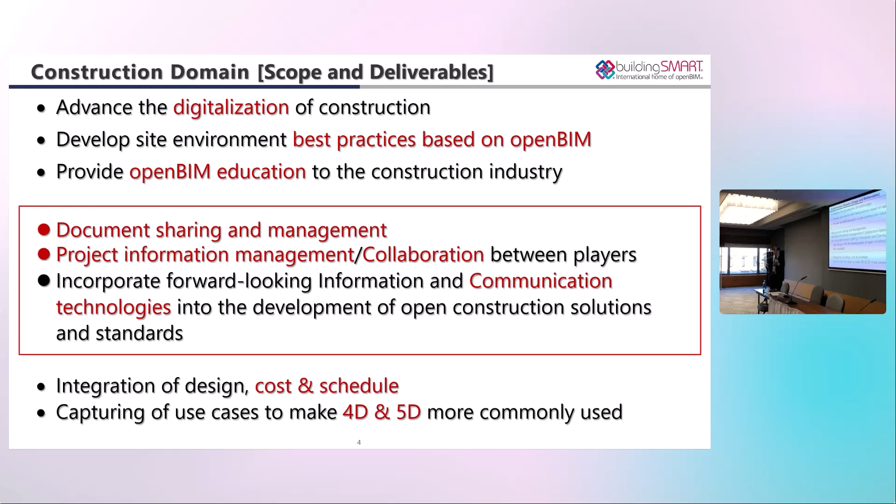The next one is the scope. Today, we mainly explain about three things: document sharing and management, project information management and collaboration, including communication technologies. And why we set this title for the presentation, Quality Management of BIM in Construction Phase?

Quality management is based on the manufacturing industry, with an inspection process where you must manage the line, and how to create a very high quality product is the mainstream. But when we adapt this mindset to construction, what we should do is the question. We found that managing data is very important, and it directly connects to the quality of the BIM model, which affects the quality of the building. That's our basic fundamental philosophy.

Today, I'd like to do a fast pitch, 30 minutes, then a QA session, then hand over to Scott. My session starts from the very beginning, the fundamental technique of how to manage a construction site using CDE. Next, Scott will get much more into the deep side about property, how to set the proper property set, and then start the project very efficiently.

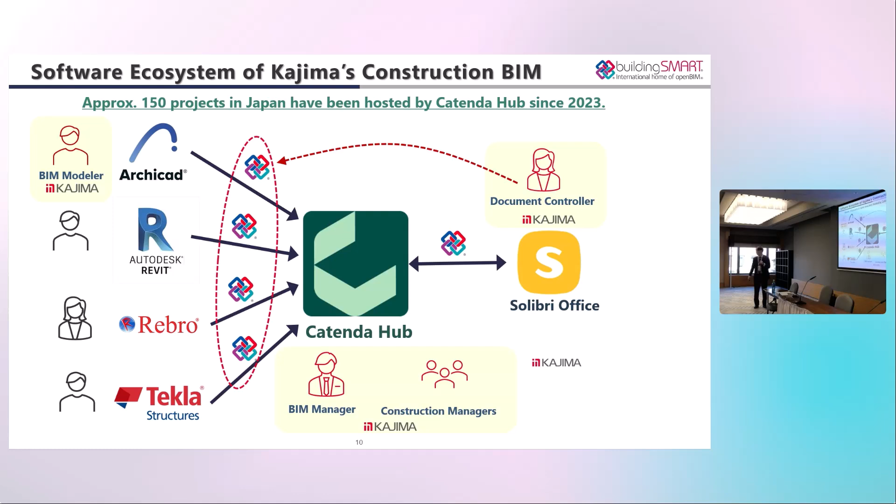Yes. So in 2023, we started migrating Catenda Hub to our construction sites. Kajima is a very big general contractor worldwide. But first of all, we started to migrate it at our Japanese sites. We usually have more than 250 construction sites, and we started to migrate it one by one.

And now approximately 150 projects in Japan have been hosted by Catenda since 2023. So that's the information today, from my experience watching all those projects run on the Catenda Hub.

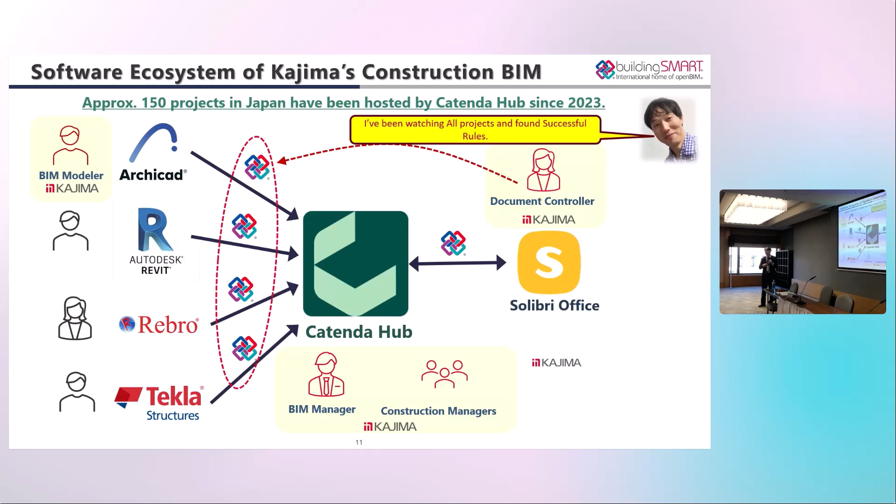Firstly, I want to say very simple rules, which are kind of the conclusion of this presentation - just 2 rules. Many of you know how to run or use the CDE, and yesterday I saw many presentations about using the CDE. But in this presentation, I'd like to show you some very fundamental, simple rules that you can bring back and use starting from tomorrow's site work.

That's my purpose. So the first one: define file name convention and keep it strictly. It's very simple, and very, very fundamental in the IT world. But if you don't keep it strictly, our CDE process does not work well.

So we decide and define the file name convention by date of BIM coordination meeting, by discipline, and by company. It means year, month, and date, then discipline comes next, then company. So every company who creates a BIM model names it like this: year, month, architecture model, Kajima's model, IFC. That's the very important standard and rule.

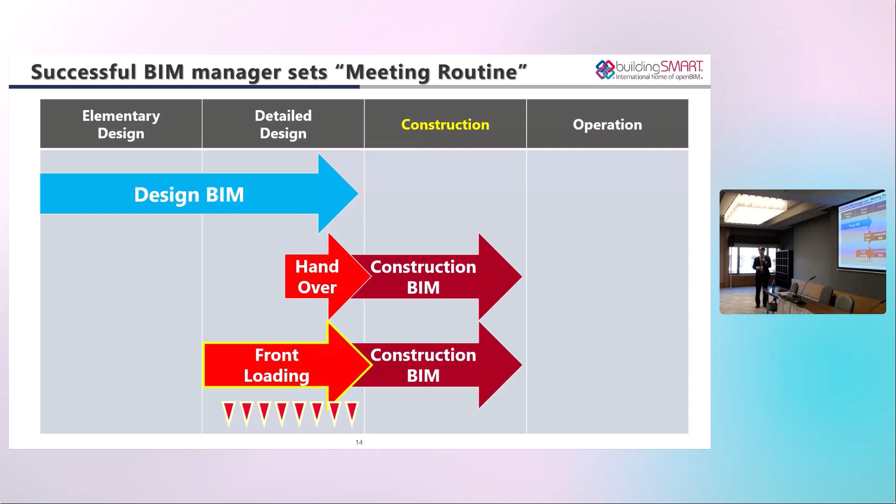And the process is like this: normally the construction manager sets a bi-weekly coordination meeting, meaning every 2 weeks, one meeting. So here is the coordination meeting, and they set a deadline for submission of the BIM to the Catenda Hub - 4 days before.

So all the members of the modelers can work, and then must submit the model at the deadline. Their work locally is not on the CDE of the Catenda. Catenda does not have authoring functions. It has a very strong viewer, and then some measurement or slicing function, or the document management repository.

But locally, there is the Archicad BIMcloud server. So Kajima's architecture model, the creating modeler, works on the BIMcloud server with the native file of PLN.

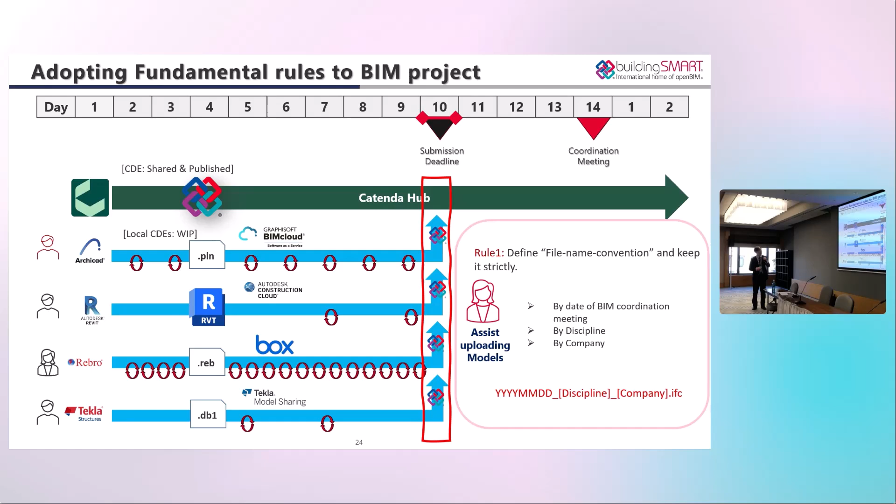So all done here. So what I want to say in this slide is keep a single source of truth. Here I write the single data of truth, and today I explain the file of truth. So it's a very fundamental level. Now you are very interested in the incremental BIM model, just uploading and replacing the updated part of data. But fundamentally, we should start from file management very precisely, and then you can move to more sophisticated management techniques.

So the rest of the presentation is some extension of this workflow. I explain this workflow, the EIR and the BEP, and it starts the project. So the file models are categorized into these 3 statuses: work in progress, shared, published. So this cycle runs.

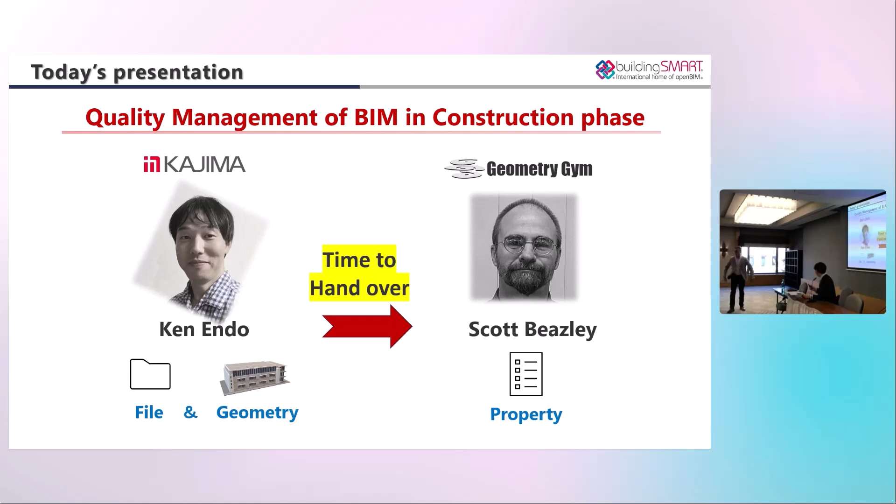On that slide, you showed that each team has their own common data environment and they upload to the common CDE. Yes, this one. When they upload to the common CDE, they upload with their internal naming convention, and then the reviser of the naming convention goes to the common data environment that's for all and changes the name. Is it like that? Did I make myself clear? Yeah, that's okay, a very good question. Thank you very much.

So it depends on the site. If the scale of the site is middle or small size, then we ask the modeler of the specialized company to keep this convention. But on a huge-scale project, they handle more than 50 IFC files, which means 50 modelers. So they upload to Catenda Hub by themselves, and we need some assistance. So the role of the document controller is to assist before uploading the file to Catenda Hub.

So the question is, how can you relate easily, when you have some issue with that version, their internal version with the version that's on Catenda Hub? Yes, the shared version. Every 2 weeks in this case, the shared model is uploaded to Catenda Hub. Yeah, I understood that, but imagine they upload to Catenda Hub with their own naming convention, and then someone changes the name to the project convention. If you need to tell them, you uploaded this on this date, this is the official version, how does it relate to the version on your own CDE?

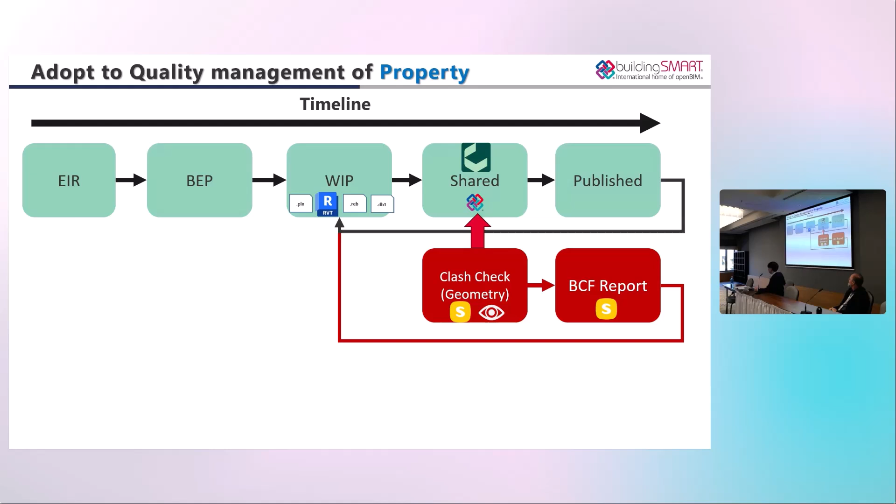But if you want to qualify the data much more, I guess you should set or add some description here in the BEP and then give it to all the companies you work together with. And at the same time, you define IDS, so in this property set, the data should be written like this, the number or some text that you can define with the IDS, and then check this in the same process.

So set the deadline, and then every submission, the individual modeler checks using the IDS, checking the model before submission.

Is that good enough? Yeah. Yes, thank you very much. Any idea on how to?

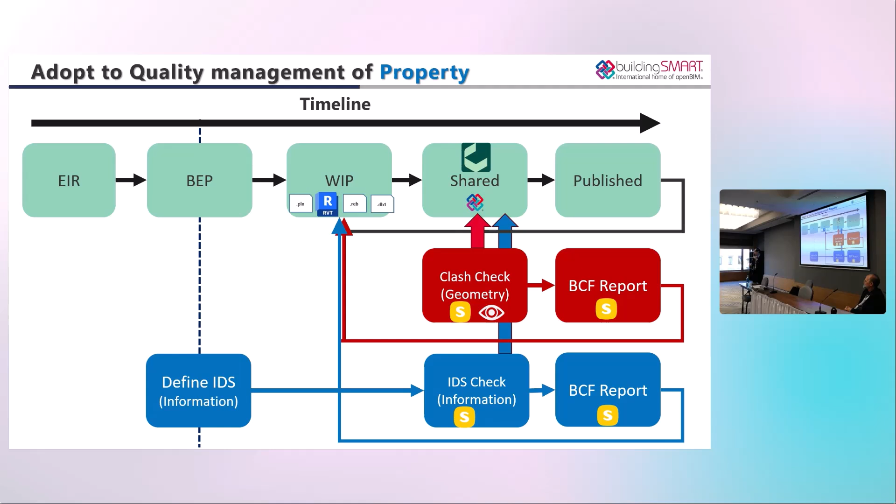Say one question. IFC5? How does IFC5 affect your workflow? Oh, yes. I guess it's affect and then change the workload dynamically, and then much more, shorten the period of updating the process. But the reality here is in the early stage of the federation, not all the companies join, but gradually the MEP model, the MEP company or elevator company, those kind of small, very specialized companies join.

So it's very difficult to set the same start line. So gradually, it's better to move to the incremental BIM model management. But initially, at the very early stage, it's much better to manage by file. It's my opinion at this moment. Thank you.

I guess it's time to hand over. Okay, if I may just. So first, when I look at your presentation, congratulations. It's a great presentation, and it reminded me of what Tolstoy said. Every happy family is very similar, and every unhappy one is unhappy in its own way.

So in this case, if you see now what Catenda is doing, or for example, what Bexel is doing, it's literally the same things, same workflows, and everything done in the same open way. That's really what I like, and that's the right way. That's, of course, our opinion. But I just have two questions and one small suggestion. So question one is maybe for Howard or for you.

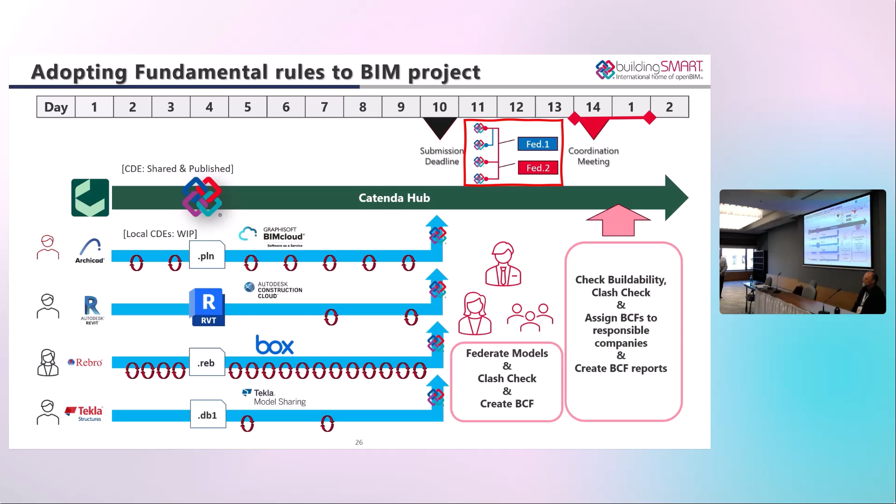Okay. Thank you. And just one suggestion. If you can go back to the slide before. In our workflow, we automatically split by location. For example, you have a 1,000 kilometer railway. You don't want to load the entire discipline, but just a couple of kilometers. And the same if you have 20 buildings on the same site, you want to divide up per location or per floor.

So maybe you can consider adding an additional level. In Bexel you have an automated way to split original IFC files into smaller location-based chunks, not just by discipline and company. Okay, yeah, that's good. Great, congratulations.

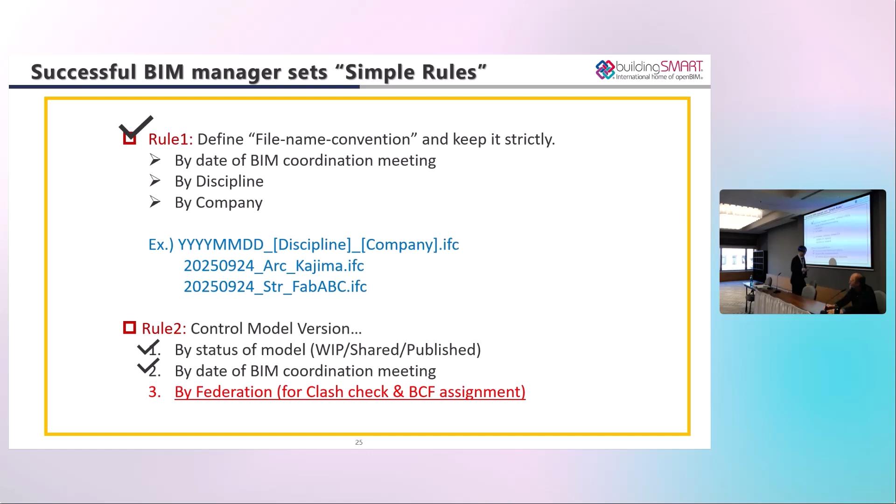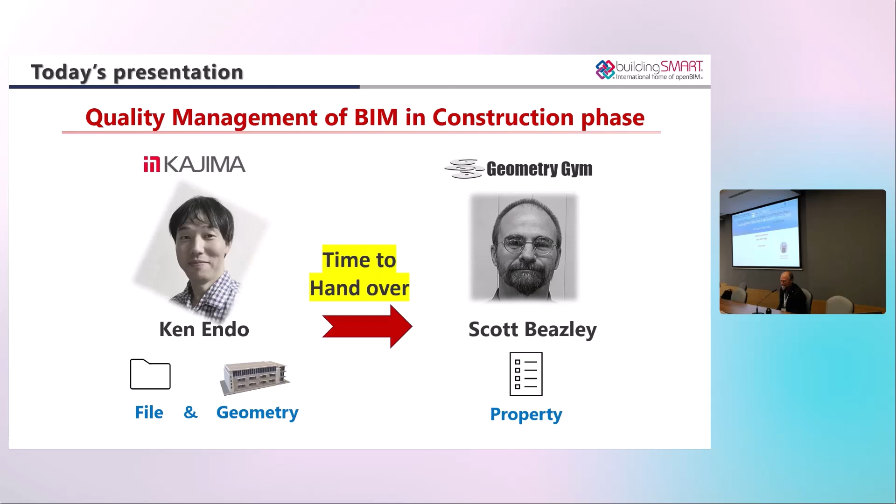All right, so we hand over to Scott. Good morning, everyone. Sorry, my voice is a little rough, had a good night too. I'm only going to mention AI once, and I've just done that. I'll only mention IFC 5 once, and I've just done that.

It's quite a different kind of conversation today. And I hope it is a conversation, because this is just putting an idea out there for us to have a look at. Just look at the context of what contractors have to face when it comes to dealing with digital information. A proposal, an open BIM pledge.

I'm sure a lot of you already know of Dion Moult, who is really a major person behind Blender BonsaiBIM. He works in Australia, I work in Australia too, and the Open BIM pledge has come out of that conversation. There's a link there. Unfortunately, with the way the tech's set up, I won't be able to go to the website, but you might want to open that up at some stage.

So what is the context for contractors? Basically, they receive stuff from other people. Now, Dion works for a large tier 1 contracting company, Lendlease. I work at Geometry Gym with Jon Mirtschin, and we do consulting for large contractors. We face the same issue. The files that they receive, the ones that we deal with, often are imperfect. So like the comment over there, humans aren't perfect, their production is not perfect. And so the quality varies.

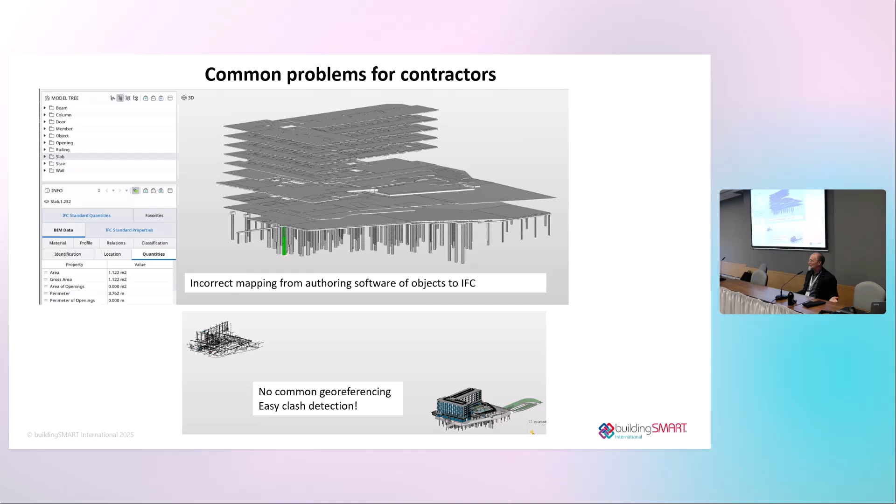So here's this idea of an Open BIM pledge. The context is, how can we promote the knowledge in this group, in the buildingSMART community, of the depth of the IFC schema? At the moment, I think we collectively use probably about 25 to 30% of the concepts that exist in the IFC schema. So if we could burrow down a bit more, maybe we could get some better quality information. And wouldn't it be nice if we had clearer ideas about what the content of models is? So the Open BIM pledge is to try and do this.

As I mentioned yesterday, a lot of this stuff has been solved by large contractors and hopefully large consultants, but the tier 2s, tier 3s and the smaller contractors and consultants haven't solved a lot of this. And I think we as a community could help solve this. So Dion was up at 1 a.m. at night and did his blog on the OSArch site, and there's a lot of words there. So I've tried to condense this into a few graphics that might make it a bit more accessible, but if you want more detail, it's on the website.

And the concept is, wouldn't it be nice if people could sign up to the pledge and say, we're going to operate at a particular level? I'll explain that. So there's the OSArch website. Again, this is Dion's site and Dion's conception, and I've just been assisting a little bit in the context that I've had experience in. When I originally tried to distill what he'd said, I was trying to put a graphic on one page, because when you go to a website and you scroll down and down, it's really hard to get a conception of what's going on. This was the first way I conceived of it.

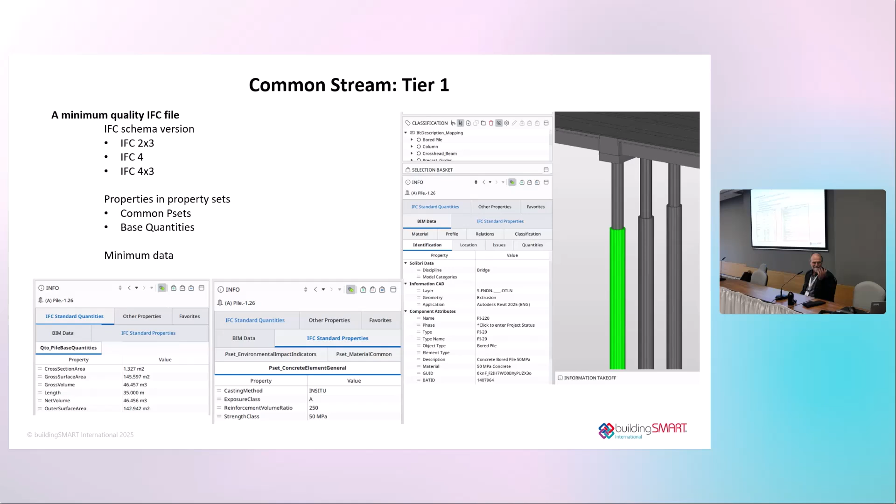And the dilemma then came was that really all the areas at the top, they're the specialty areas. And you kind of go, well, aren't we talking about things in a streamed way? So that was the first conception. The next one is like this. I will zoom in on this, but the idea is that there's common information that we expect. There is a design component, and then we've got various specialities after that. So basically, we expect that thing to have particular properties at, say, a tier 1 in a common stream, and so on. I won't go into that too much detail.

Now, here's a bit of detail. The common stream would apply to everything. So you might say, can people read the detail of that? Oh dear. Okay, well, when you get the slides, okay, I'll explain it a bit more then. So,

Okay, so the common stream would apply to any IFC file. So you can say, well, my file, I want it to be at level 3, so I've got the attributes there for name and description and so on. And you might say on a project, I'm really starting out, so I'll aim for tier 1 just so that things there are classified correctly. And then as we go down, there's greater level of detail. On the common stream on the left-hand side there, tier 4 is I'm using bSDD and I've written it myself, and so you can expect there's something different there. So that's a way of looking at the detail.

In the design stream on the right-hand side, you might say, I've got an architectural model, and I'm going to have it geo-referenced. So that's the first level there. The next one down, there's spatial hierarchy. When it comes to infrastructure, that's really quite important. And then tier 3, all the geometric data is to an LOD, and we can use it for defining clash detection by IFC classes. And the design would mean any type of discipline, we could specify this. Again, you can't really read that as well.

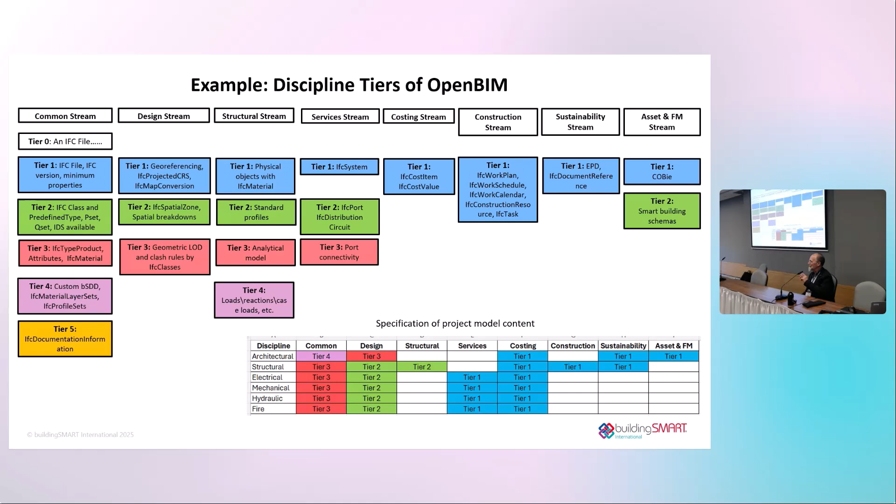Okay, so this is just a bit of an idea putting out there. That's just another version, you can change it the way you like. But again, this idea of how can we actually understand and classify the IFC schema in useful ways that people can deal with and include in models.

So Dion was kind of wanting to push the button a bit. He said, wouldn't it be nice if we could get people to sign up for this and say, yeah, I think for an architectural company we'll aim to be a tier 3. And the kind of thing is, what if we actually met up every twice a year and said, here's a project that I think achieves that, and so we're raising the level of competency and production in the industry.

Online generally, because people are scattered all around the world, and share lessons. So is this actually achieving an end? Is this a worthwhile thing? And also getting some feedback. If this is rubbish, or it could be better, we're open for that sort of conversation. But how can we make the complex world a bit simpler to deal with, but in ways that are actually useful?

And on the OSArch site, you'll see that he's got a list of people who've notionally signed up for it. It's not contractually binding, it's just aspirational at the moment. And it would be nice to think that this community is trying to raise the bar when it comes to open BIM and use of IFC. So I'm open for questions and feedback, and if you think it's all rubbish, fine, let me know, I'll find something else to do in life. But I think it would be good to have a conversation and I'd be interested in your thoughts. Thank you.